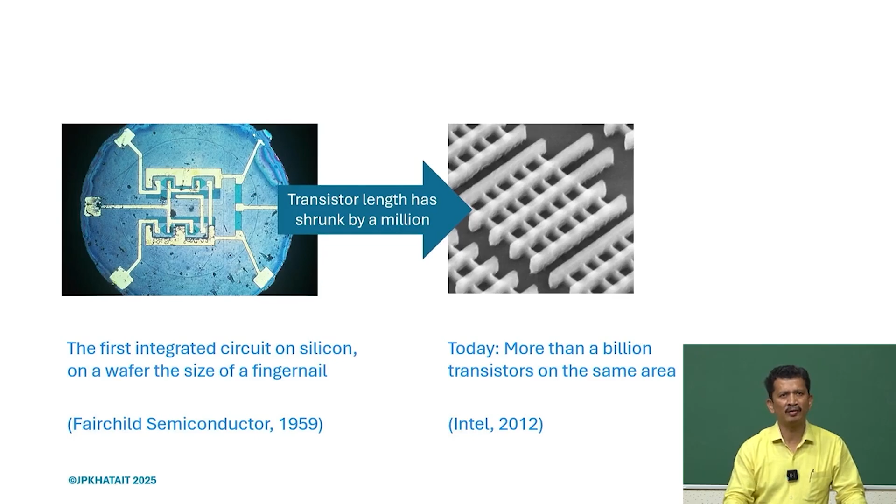And Intel has projected that by 2030, there will be 1 trillion transistors in a chip. So, you can see how things are moving. It's not that the size of the chip is increasing, but the size of the transistors is decreasing, and we are cramming all those transistors into the same footprint, almost the size of a fingernail tip.

If you want a very good overview of the semiconductor industry and how it has evolved, this is a very good read: Chip War by Chris Miller. And what we realize is that today semiconductors are the new oil. They drive everything. If the semiconductor industry gets affected and chips are not delivered in time, nothing will move, because it affects the production of every product, machine and equipment we use today.

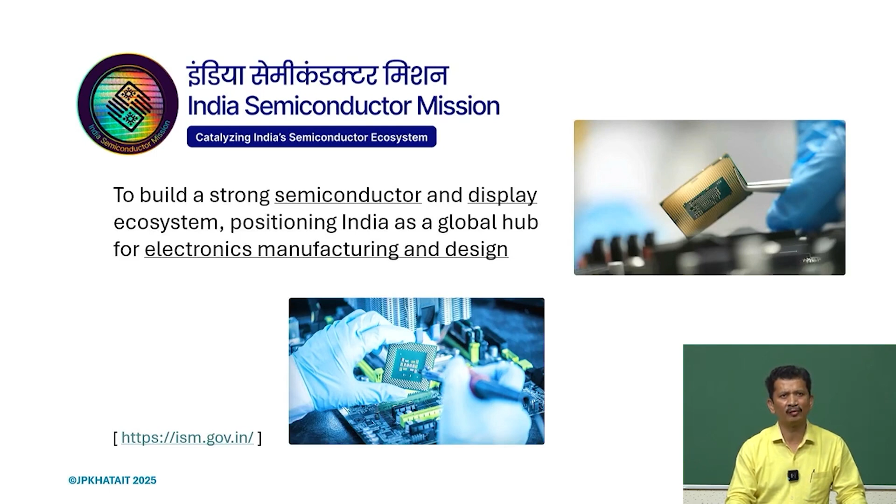We are also not behind. Though we started late, the government has started the India Semiconductor Mission, with the emphasis to build a semiconductor and display ecosystem, positioning India as a global hub for electronics manufacturing and design. Under this initiative, 76,000 crore is already invested, and 5 projects are approved for the semiconductor and display manufacturing ecosystem in India. So, are we ready for that, or are we simply relying on machines built elsewhere?

If semiconductor manufacturing is coming to India, what kind of support can we provide? Can we design and develop systems for our own use, do we have the manpower and know-how, so that we are not totally dependent on others and can slowly localize semiconductor manufacturing in India? So it is very important to understand what the semiconductor manufacturing ecosystem looks like. We have wafers and many wafer makers involved, and several processes: cleaning, deposition, lithography, etching, CMP, packaging.

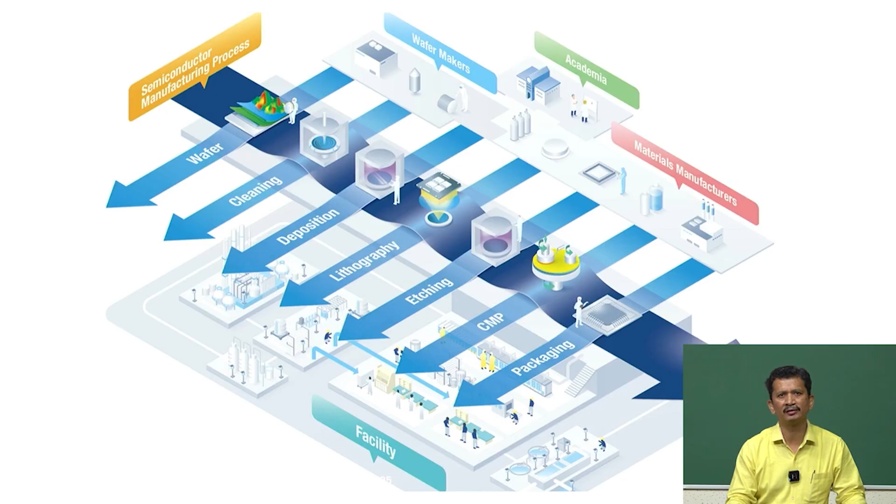So, there will be materials manufacturers and facility development. So, are we going to support all these activities, whether we have enough manpower with the sufficient know-how and knowledge? I think this course is one of the steps towards that.

So, first try to understand how these chips are made, and if you do not know, you may be surprised to know that the raw material for the chips is actually sand. So, we start with the sand, and then it is melted, and we try to get pure silicon in its purest form, and then you convert into silicon ingots,

and then it has to be sliced into thin wafers, and the wafer will be the input material, which undergoes a lot of chemical processes, different kinds of processes under different kinds of machines, and ultimately chips will be delivered.

So, going further, we start with the silicon ingot. We do the slicing there, first slicing, and the quality of these wafers created may not be very good. So, it has to be polished to the requirements. The order of thickness of these wafers might be about 700 to 800 microns.

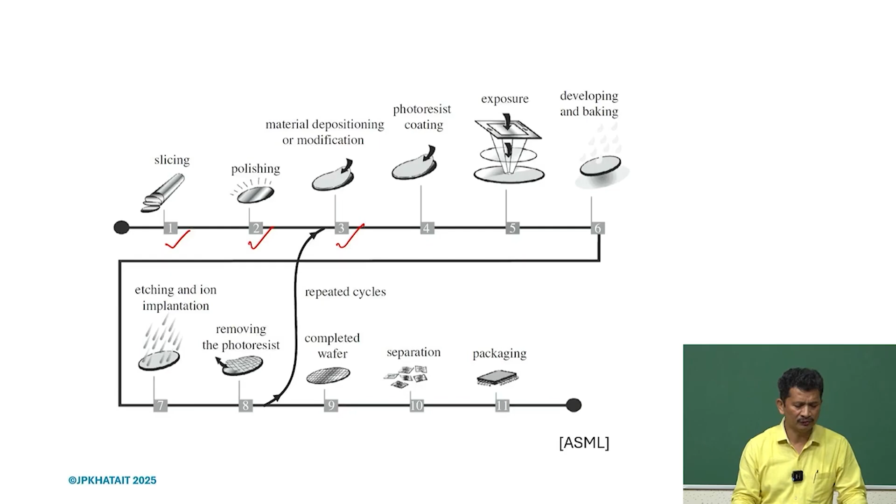So we will go through various processes after that. There will be a lot of material depositions and modifications, and then we prepare it for lithography. There will be photoresist coating and it will go for exposure. This is the critical step and a lot of precision machines are involved here. It's very much like photography.

So we have masks, so the design will be there, and there will be optics involved and then it will be shined on an individual chip. And then once it's done, there will be developing and baking and many chemical processes, like etching, ion implantation, and we will remove the photoresist.

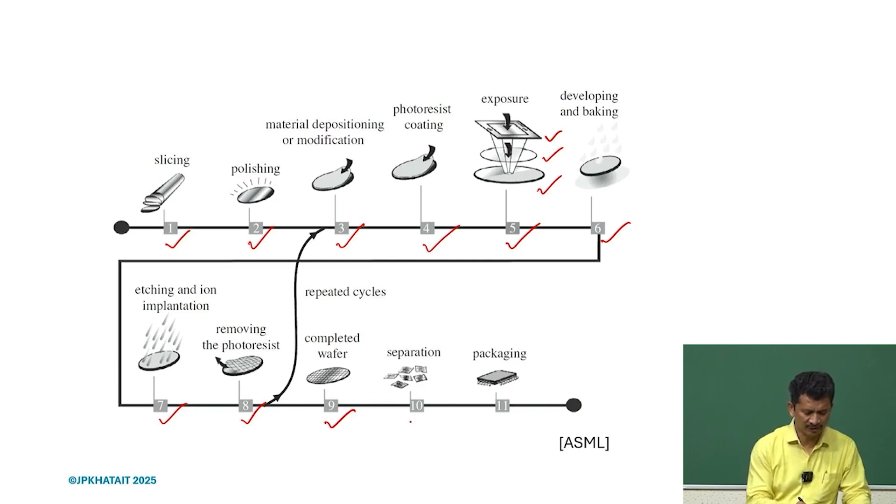And then there will be many repeated cycles we will be doing because we will be creating layers and layers. And once the entire process is completed, we get the completed wafer. This wafer has many chips. They will be separated, diced, and then these individual chips will be packaged and we will get the devices

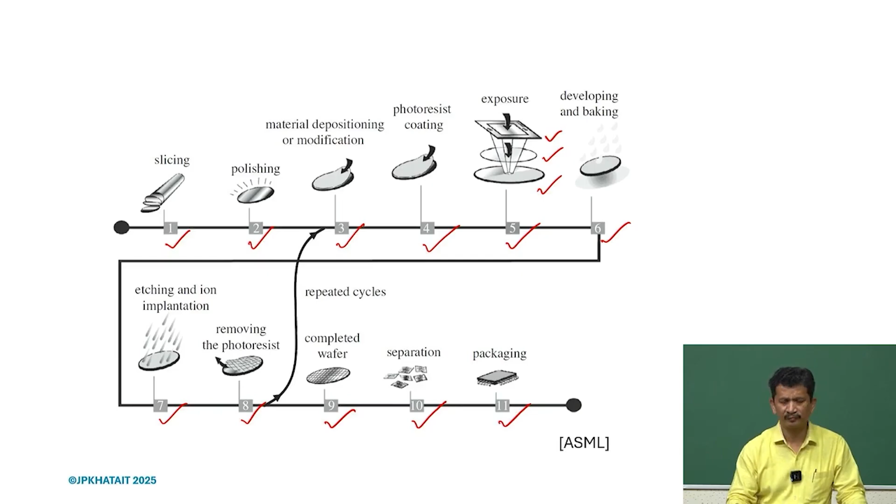we have. So each and every step is very intricate and involves a lot of precision processing and precision instruments, machines, equipment. So if we try to characterize, we can divide into different kinds of processes. Usually one is called front end processes, which involve lithography operations.

So what do you see here? Many cycles. As I just mentioned in the previous slide, we have this wafer and then there will be oxidation, diffusion, so we do a lot of chemical processes. Then a thin film layer will be put there and ultimately it will come under the lithography system, the design will be shined, and we will do the developing, etching and implantation, and it will be repeated through many cycles.

And then the metal wiring will be done. Again, it's also a kind of deposition process. And then once it's done, the dicing will be done, so we will get the individual chips.

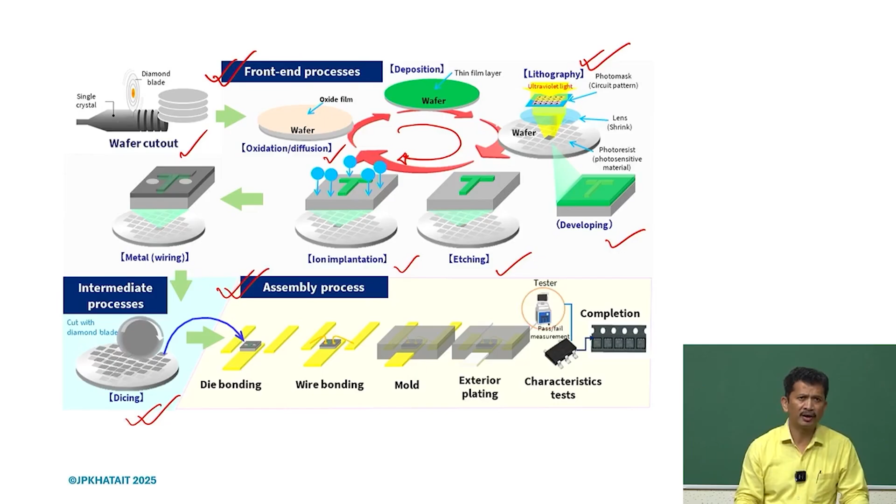The assembly process is generally termed as back end processes. We take this individual chip, then there will be die bonding, then wire bonding, mold, plating, and then it will be individually tested and we will get the device, the chip.

So many processes are involved and we need to understand how these processes are performed, what are the process requirements, and whether the machines we have or want to develop can meet those requirements.

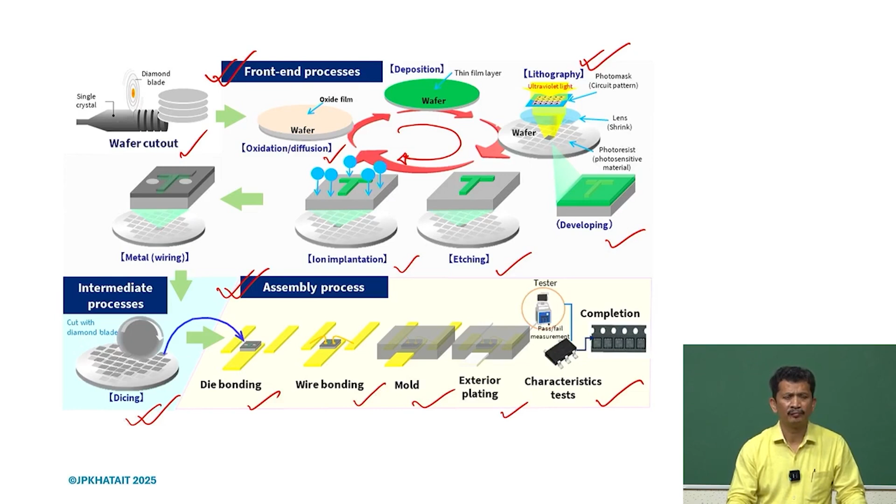So lithography is one of the critical steps and, as I mentioned, that is more like a photography. So printing the circuit design onto the wafer. So we have a light source. So it is shined on a mask. So mask has the IC design, what we want to put on the chip, and there are lens systems. Through the lens, it will be projected on the wafer and the chip pattern will be made on the wafer. And you can see there are many chips.

So one single wafer can have many chips, and there are a lot of chemical processes involved, explained here. So we may not be going into the details. We simply want to understand what the processes are and what the requirements are, so that we understand what kind of numbers we are working with, what kind of mechanical specification, design specification we want to have. So, that is the front end process.

But once the chips are made on the wafer, it has to be inspected. So, each and every chip has to be inspected. We do not want to have any kind of defective piece. So, it is 100% inspection. So, there are a lot of processes again involved. There are wafer inspection systems, and of course, if we want to increase the yield, the process cannot be slow. It has to be very fast, but at the same time it has to be very accurate. So, under the wafer inspection system, every chip has to be inspected, and the defective chip has to be thrown out.

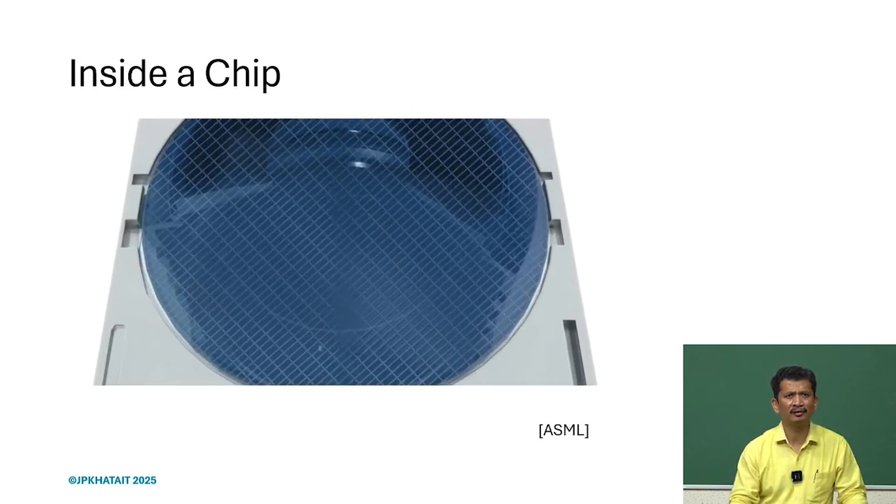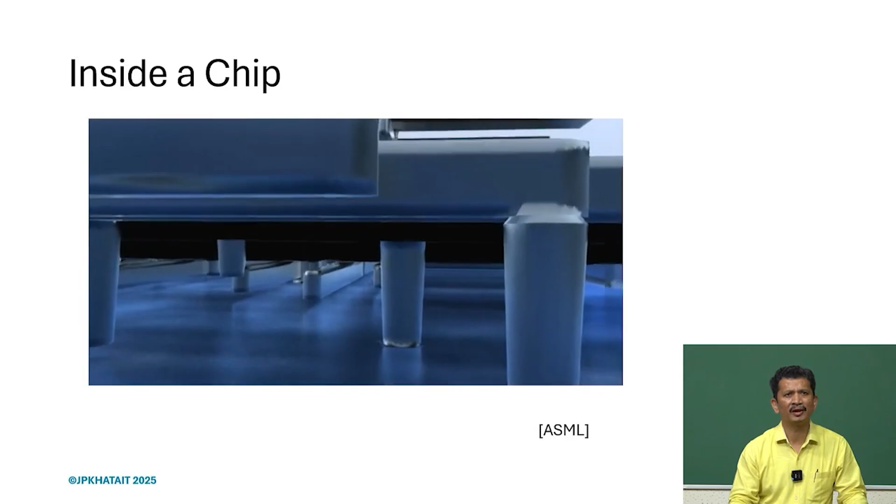So, the wafer you see, as we zoom in, we are zooming to a chip level, and now we can see the individual circuits, the ICs, and if we go further, what we realize is that there are many, many layers. So, many layers, and there are interconnections, so metallic connections are there. So, it is like creating a 100-story building with the plumbing, with the electrical connection precisely, so that it functions well. The only difference is the size we are talking about now: it will be within the size of a fingernail, what we can say 5 by 5 or 10 by 10 millimeter square area, and we have to create these structures precisely to that level.

So, we also try to understand the machines. So, ASML is producing the state of the art lithographic systems, and it is very nice to see these systems and understand what the precision requirements of this system are. So, we will go through that, and we will watch a small video of the system here.

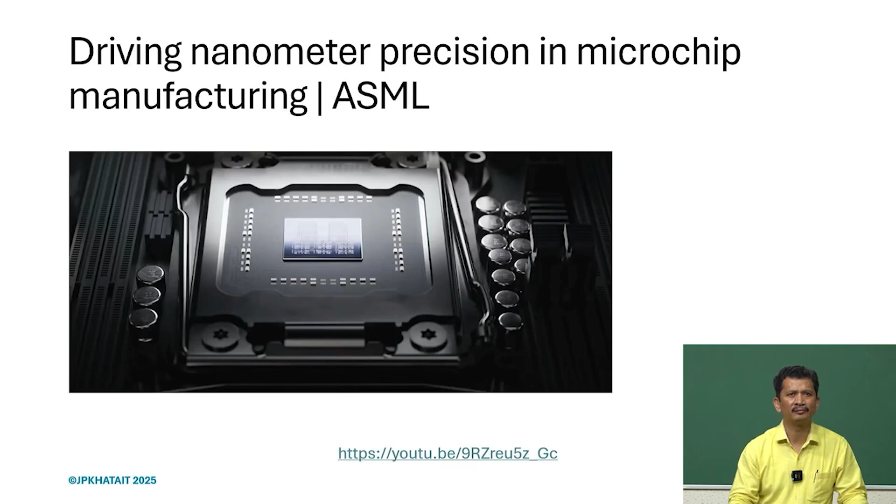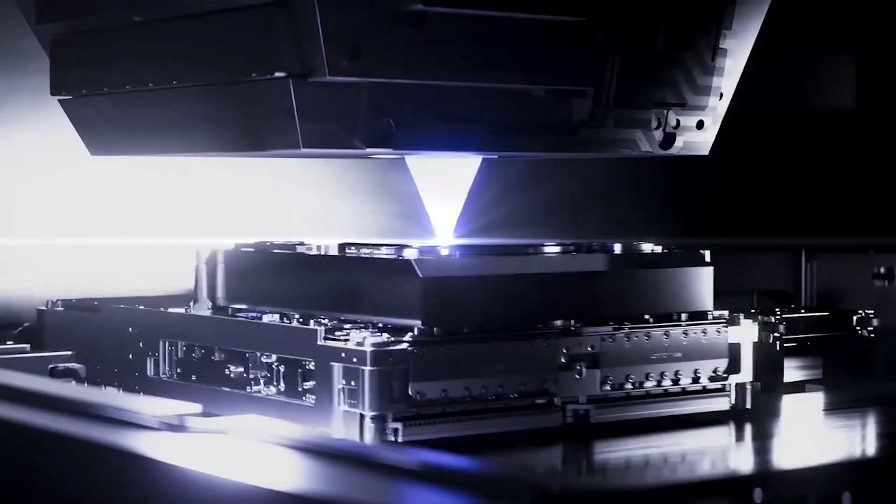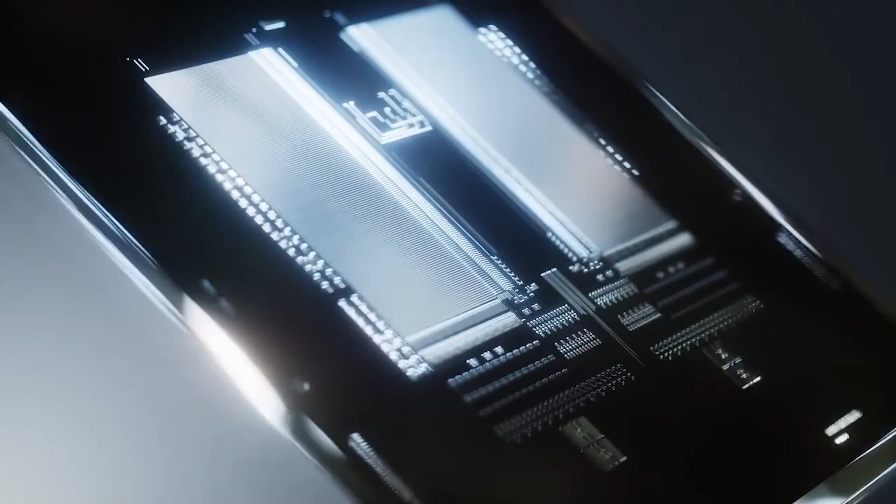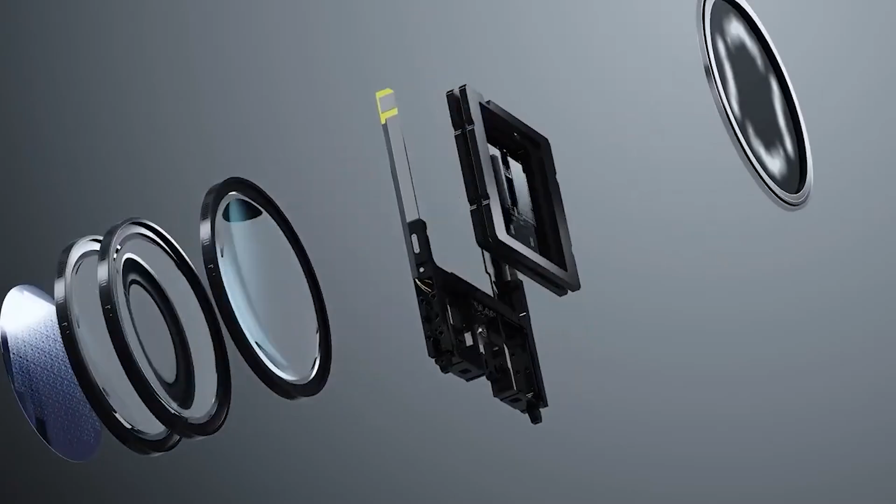A chip is a tiny skyscraper. Its circuitry often includes billions of transistors and stretches through more than 100 layers, and every structure needs to connect perfectly. At ASML, we build hardware and software that helps our customers mass produce this microscopic circuitry. Our lithography systems print chip patterns by shining light from a source onto a blueprint or mask, and then harnessing that light with optics to transfer the patterns to silicon wafers. But in the world of nanometers, physical and chemical processes deform the pattern. So as chip features continue to shrink, lithography becomes more challenging and more crucial. As lithography experts, we fundamentally understand the processes that influence chip patterning, and we develop models and algorithms that predict how a pattern will print on a wafer. Using these insights, we can then adjust for any deformations and tune the lithography system to produce the best possible image. We call this computational lithography. First, our source optimization tools meticulously adjust the illumination to produce sharper images of critical chip features. Our mask optimization tools design masks that correct for optical effects, so chip patterns appear exactly as intended on the wafer. Light heats and deforms the optics, so our wavefront optimization tools reshape the light once more to ensure that the pattern prints correctly. And we do this pattern by pattern, layer by layer, chip by chip, wafer by wafer, at the volume, speed and robustness our customers need for mass production. As these tiny skyscrapers continue to grow and their features continue to shrink, our task only gets harder. But we're up to the challenge. We're committed to powering technology forward with you.

So, if we try to understand the entire processes, not only the lithography systems, but once chips are made, how they are packaged, what kind of inspection systems, what are the other processes involved. So, we can also look into Taiwan's mega factory, that is TSMC, one of the foundries there for semiconductors, and we get a very good sense here of what the technology requirements are.

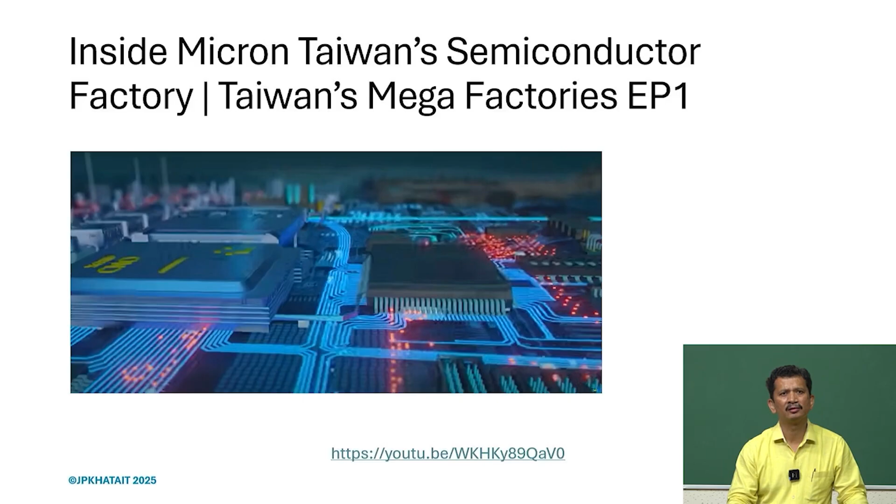And if you want to support the semiconductor mission here in India, we also need to upgrade ourselves. We need to understand what is the design philosophy to create those machines and what are the efforts required. So, not only to service or support the machines we get from abroad, from the Netherlands, from the US, from Japan, from Taiwan, but at the same time we may also like to develop these systems here to support the Make in India effort, so that we can design ourselves, make systems, and we can definitely get cost benefit, but at the same time maintain the same quality.

So, there are several steps and several modules, I would say, and it is a very modular design. So, it does not affect the entire system: if one module is affected and is not functioning well, it can be easily replaced by another one. And these systems have to run continuously without any break, because the moment there is a breakdown, it will affect the process, it affects the yield, and therefore the cost of the chip will increase. So, what we want is that the cost of the chip should not increase, and thereby we are able to afford all these systems with these powerful chips.

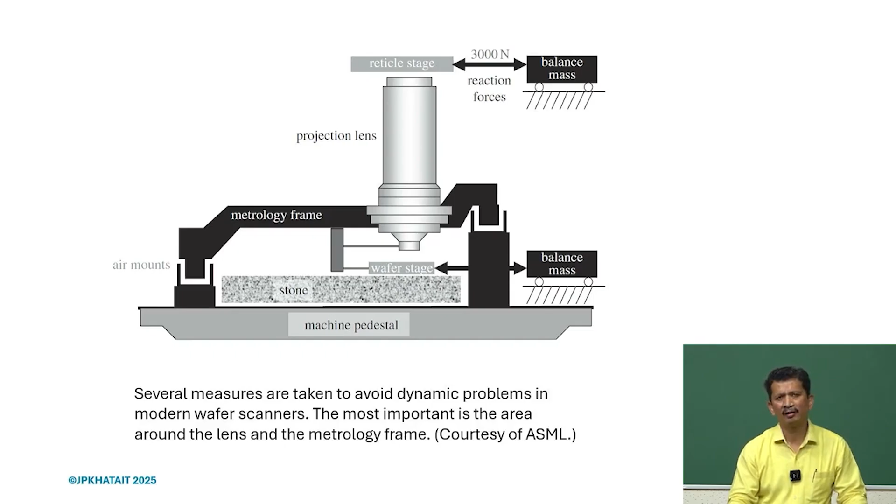So, once designed, this is how it looks. This is the latest extreme UV setup from ASML. When we look into the mechanical design and go into the details, we realize that a lot of dynamics are involved. At the same time, it is a very deterministic system, and there is a metrology frame, you have air mounts, and the reticle stage and the wafer stage are moving precisely to the nano level. What one may realize is that these systems are actually floating. There is no physical contact with the ground, and even the ground vibrations are limited. The entire system is floating and isolated from ground vibrations. But at the same time, these systems are moving at a very high speed. So, it has well-defined dynamics and control.

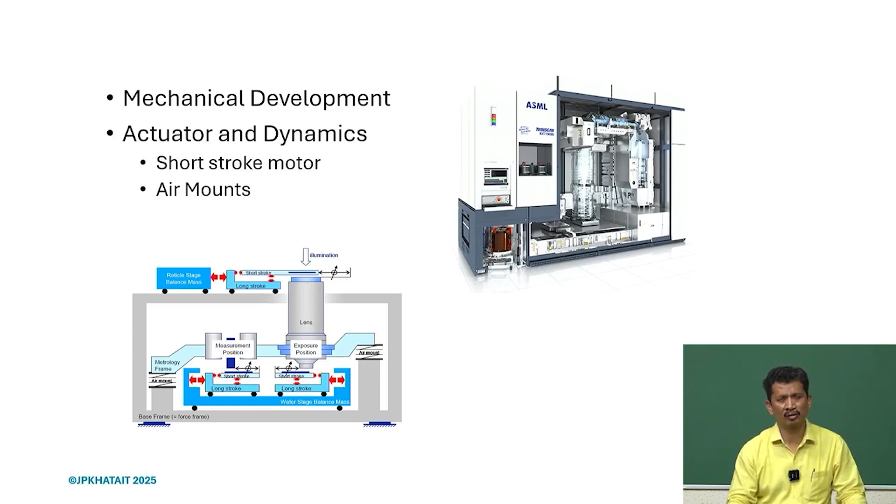So, a lot of mechanical development is required here. We need to work on the actuator dynamics. There are long-stroke and short-stroke motors, there are air mounts. So, all those challenges, all those key aspects we have to look into and work on. The challenge with such high-speed moving systems is how to maintain the accuracy. Yes, the speed and acceleration are definitely very high. How to achieve thermal stability and crash robustness.

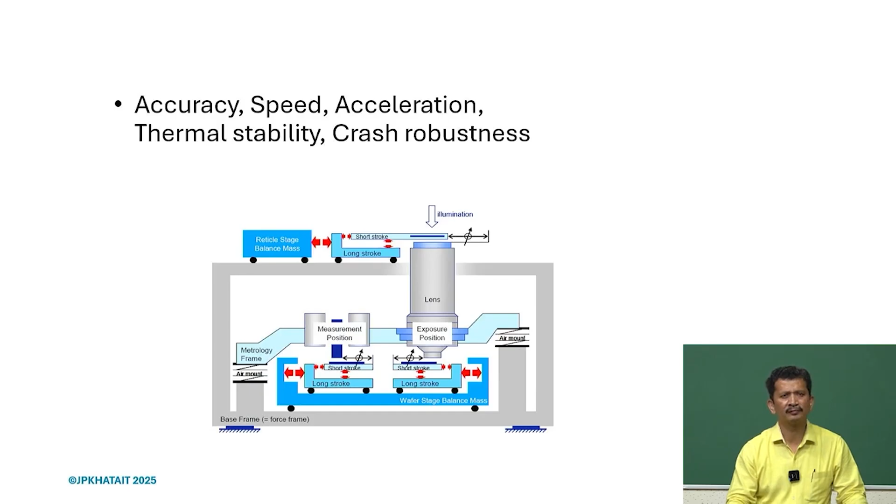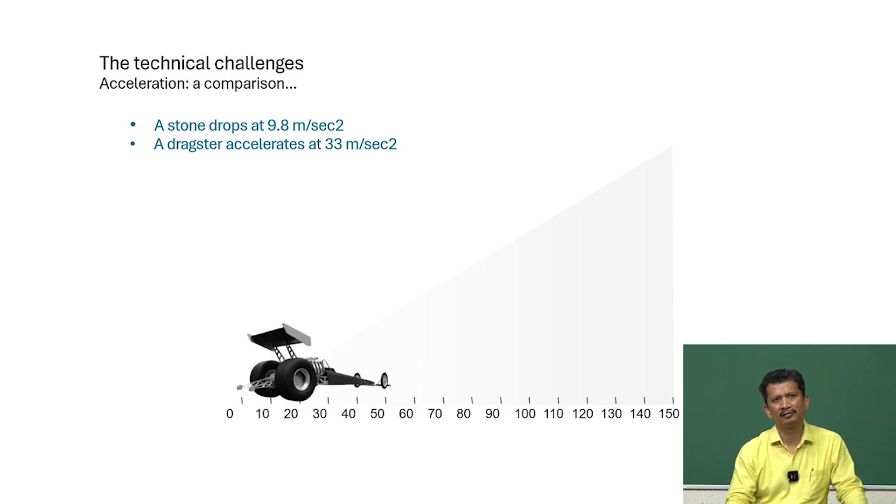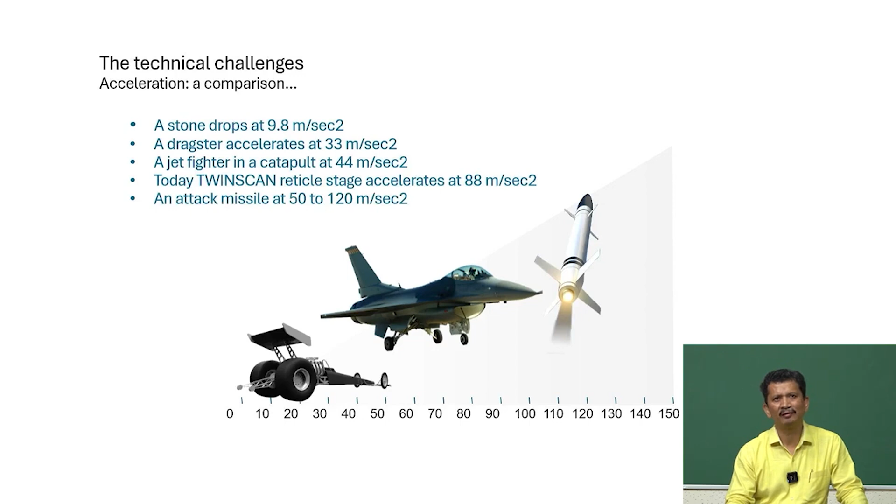So, to get an idea about the acceleration and how fast these systems are moving, we can just compare. If a stone drops, it falls with 1 g, that is 9.8 meters per second squared. A dragster moves at 3 g, 33 meters per second squared. A jet fighter has 4 g acceleration. The TWINSCAN already moves at 88 meters per second squared, which is 8 g, or roughly 9 g we can say. A missile, 50 to 120, so 5 to 12 g.

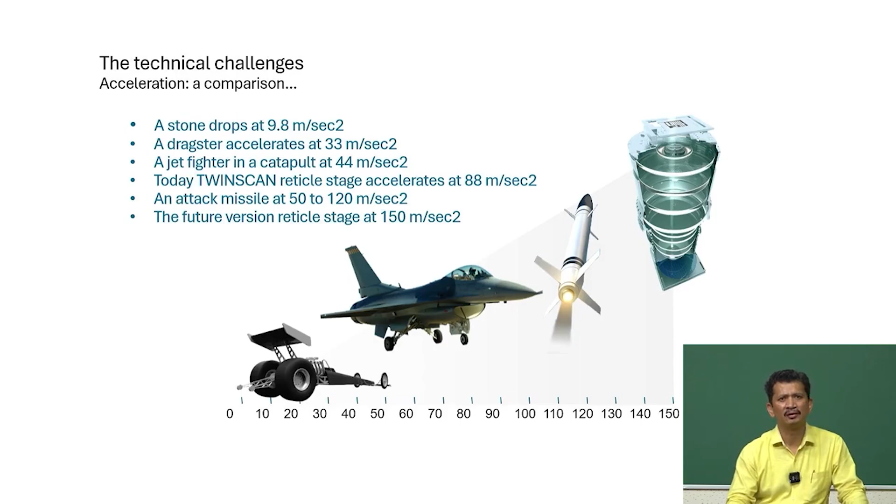And the reticle stage which is used in this ASML system or lithography systems, the target is already to reach 15 g. So, they are even moving with that high acceleration. So, how to maintain the dynamics, how the dynamics is there, and how to control and how to achieve the precision, the accuracy level required in these systems, even though it is moving at a very high speed with a very high acceleration.

So, this is the state of the art, this is what we get, and what we need to understand is that if we really want to support the semiconductor industry, it is not just the design of the chips, but how to get that chip design on a silicon wafer and then to a chip. The manufacturing aspect, the mechanical design aspects, the control, electronics, the entire engineering community, I think they need to work together and they need to solve this problem so that we can at least support these facilities, and later we can create our own systems to support semiconductor manufacturing in India.

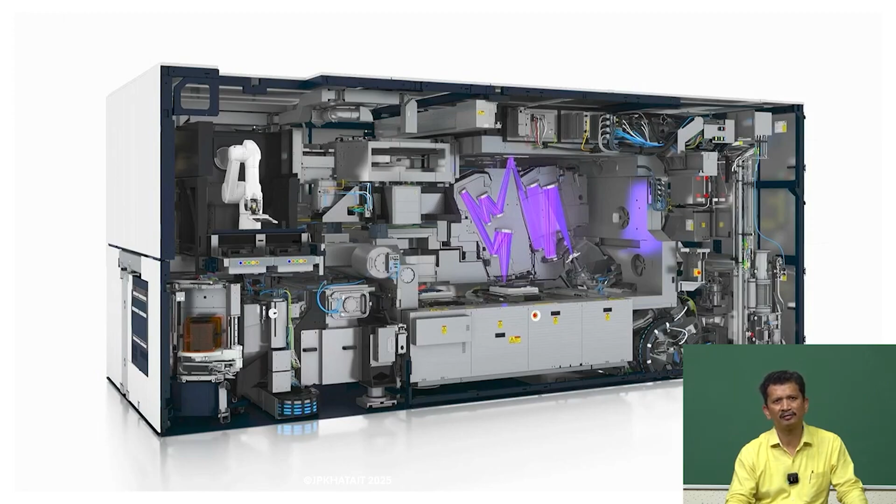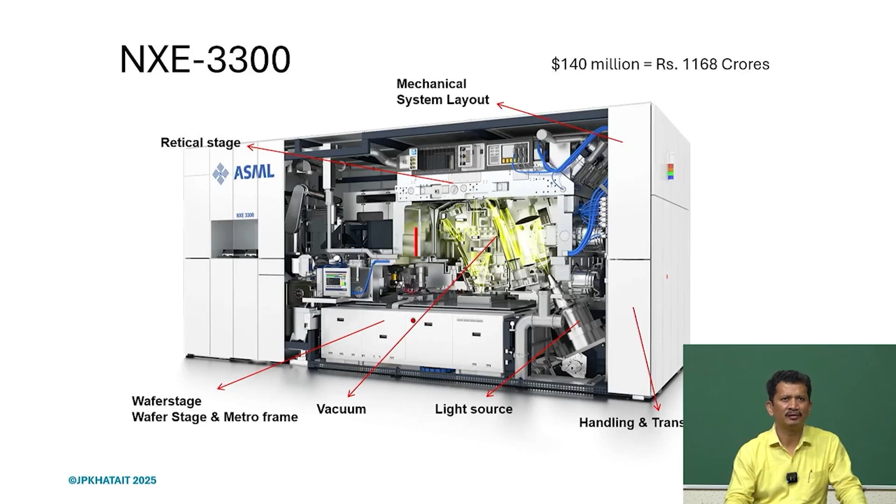So again, different elements, and this is an old number, $140 million, which is roughly 1,200 crores, but the latest system is even more. So one can expect what the value proposition is and what the cost of building these systems is. So a small effort may not be enough. I think effort from the industry, from the academia, and from the government is required to build such facilities and to run these facilities in a good way.

The other side, once the chips are made, once the wafer is complete, again it has to go through various processes, which I mentioned in the beginning, which we term as back-end processes. So for inspection, wafer inspection and metrology, as we mentioned, there are many chips on a single wafer, and each chip has to be inspected for quality and validated, and in a super fast way. So how to achieve that? What are the key elements? So if we check this, the key enabler is these motion stages, XY motion stages many times.

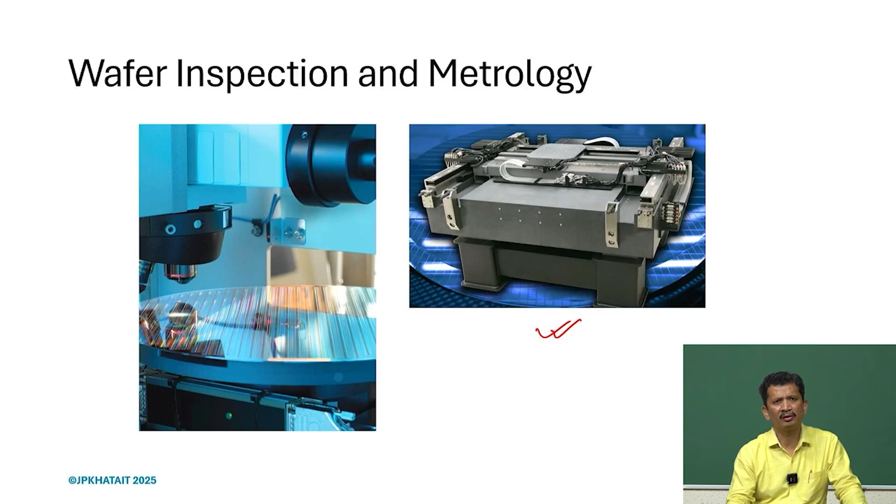So I think this is one of the key objectives of this course. We should be able to design these motion stages, achieving precision levels not of the order of microns only, but it should go to nanometer levels. So therefore, it's very important to understand the requirements, what are the design principles for precision machines, whether conventional design can produce these systems, and many times we realize that that may not be enough. There are very different thoughts, very different design philosophy.

The senior designers, the experienced designers, they know through practice, but all these learnings, these principles, have to be taught right from the beginning, so that once you graduate, once you complete these kinds of courses, you should be able to appreciate and understand how these systems are built, and later also apply this philosophy to design state-of-the-art machines and even consumer products for today's use. Because at the end of the day, even normal machining, normal processes, they also need high precision.

So we try to understand each and every component of a precision machine, how to achieve that, what are the design principles, and as we mentioned, we try to bring deterministic behavior into our design. So through understanding degrees of freedom and constraint requirements, what is exact constraint design, what happens if we have over-constrained design, what exactly it means, we will go through that. We will try to learn about compliant mechanisms, air bearings, linear motors, and dynamics and control. So from the next lecture, we will go through different topics one by one.